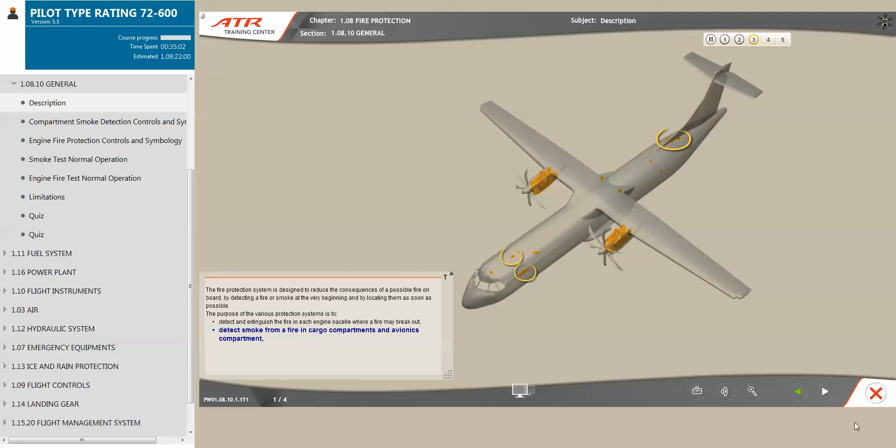The purpose of the various protection systems is to detect and extinguish the fire in each engine nacelle where a fire may break out, detect smoke from a fire in cargo compartments and avionics compartment, extinguish the fire in the areas which are occupied or may be visited in flight, detect and extinguish automatically the fire in lavatory dustbin.

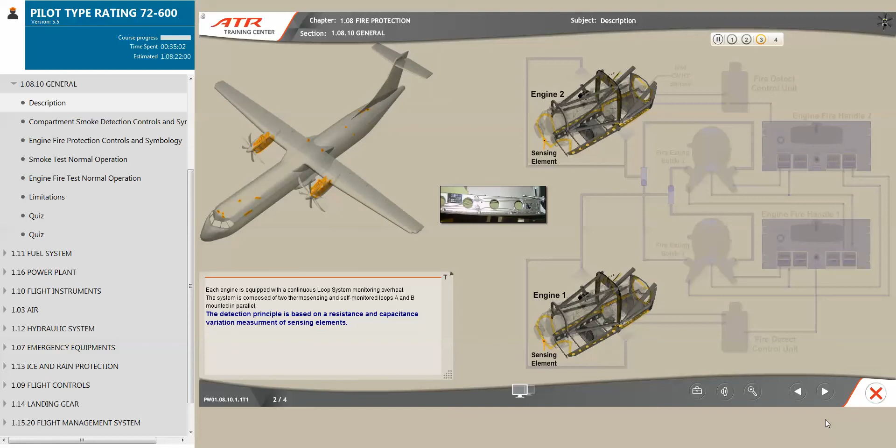Each engine is equipped with a continuous loop system monitoring overheat. The system is composed of two thermosensing and self-monitored loops, A and B, mounted in parallel. The detection principle is based on a resistance and capacitance variation measurement of sensing elements.

The Fire Detection Control Unit triggers the fire alarms only if both loops are sensing fire, or if only one loop is sensing overheat, providing the other one is deselected.

The engine nacelles are protected with fire extinguishers activated by controls in the cockpit. The system includes two extinguisher bottles which may be used either for engine 1 or 2. They are located on each side of the fuselage behind the wing center box.

Note: the extinguishing agent, CF3Br, trifluorobromomethane, is a fluorinated hydrocarbon pressurized by nitrogen. Dual squibs, which are installed in the discharge heads on each bottle, are ignited by pressing the corresponding illuminated agent push button on the engine fire panel.

Two two-way check valves enable the extinguishing agent to be directed toward the engine concerned. Extinguishing agent is then sprayed in the fire zone through nozzles.

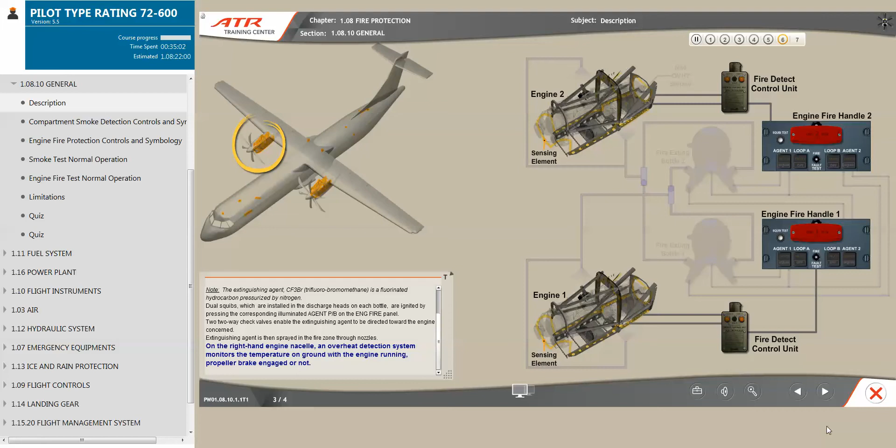On the right-hand engine nacelle, an overheat detection system monitors the temperature on ground with the engine running, propeller brake engaged or not. An overheat sensor is located below the exhaust pipes and links to a control unit. This system is inhibited in flight.

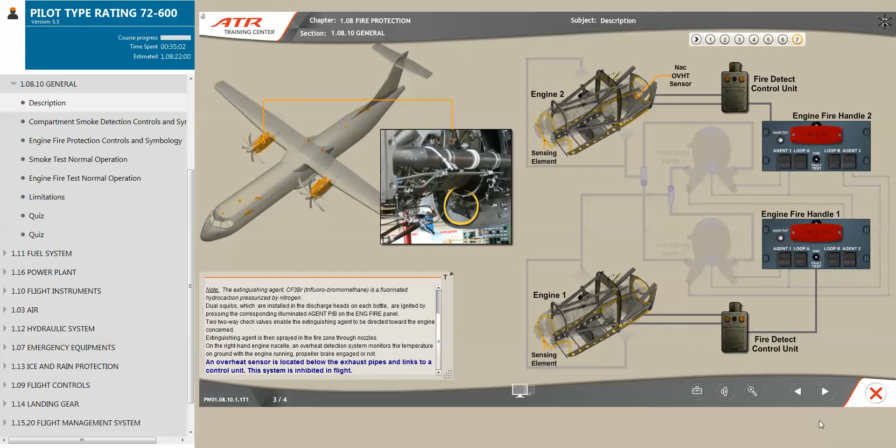The cargo compartments, the lavatory, and the avionic and electrical racks in the cockpit are protected by smoke detectors. These warning systems reduce the risk of fire through the early detection of smoke.

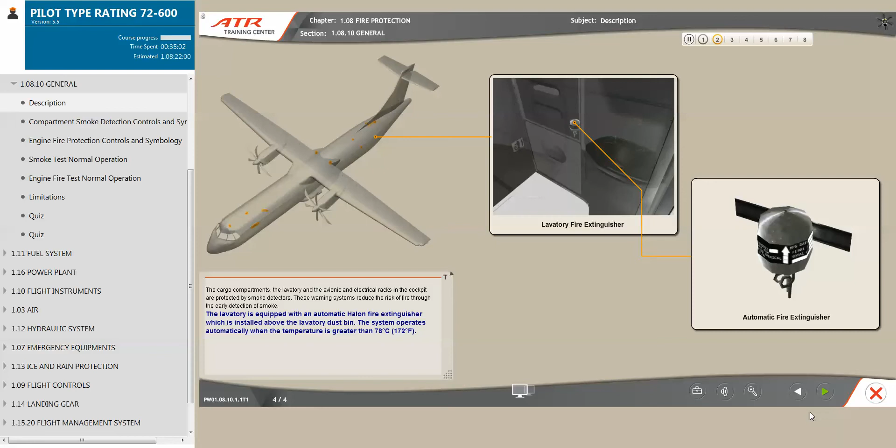The lavatory is equipped with an automatic halon fire extinguisher which is installed above the lavatory dustbin. The system operates automatically when the temperature is greater than 78 degrees Celsius, 172 degrees Fahrenheit.

The forward, aft cargo compartments and lavatory smoke detection is ensured by a photoelectric type smoke detector located in the ceiling. The principle consists of measuring the light diffraction of ambient air. Aft cargo and lavatory air is extracted and ducted through the smoke detectors by two fans which operate alternately.

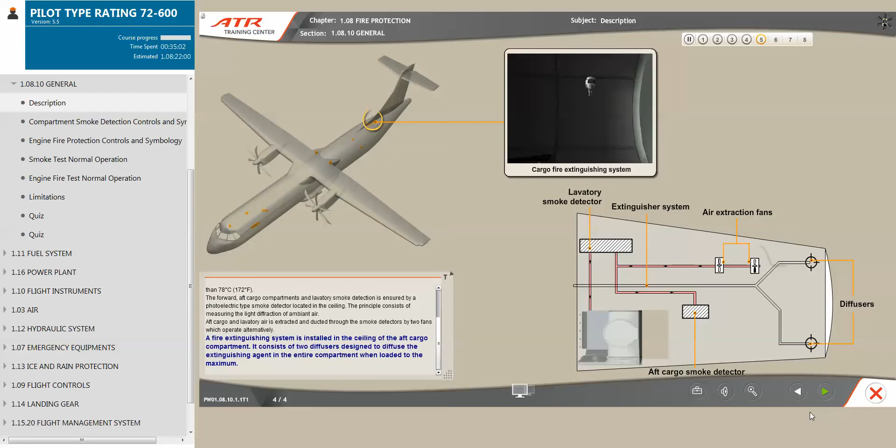A fire extinguishing system is installed in the ceiling of the aft cargo compartment. It consists of two diffusers designed to diffuse the extinguishing agent in the entire compartment when loaded to the maximum. A portable fire extinguisher is connected to the system orifice, located above the flight attendant rear seat, and discharged.

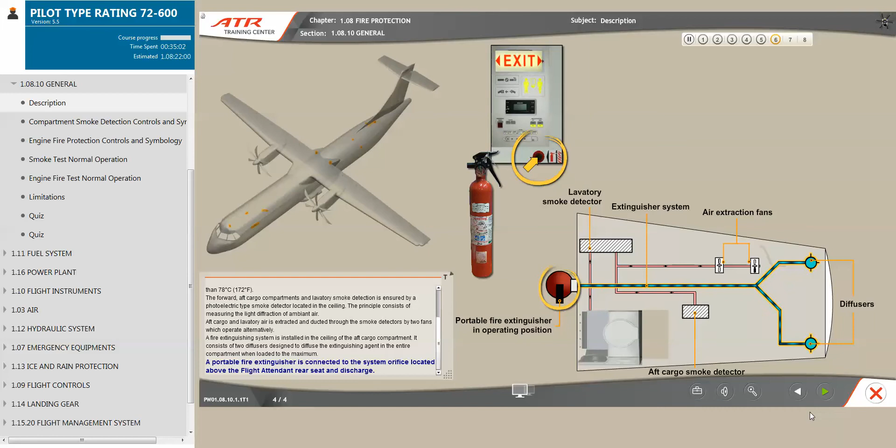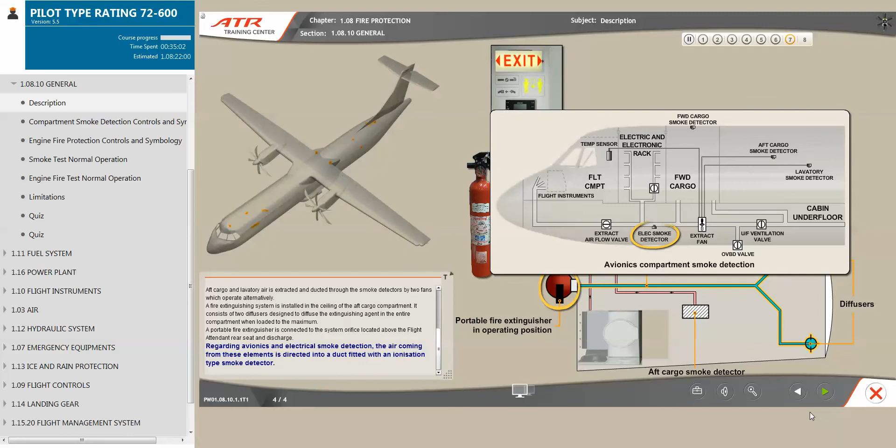Regarding avionics and electrical smoke detection, the air coming from these elements is directed into a duct fitted with an ionization-type smoke detector. The other areas require a crew member to extinguish any fire with the use of a portable fire extinguisher.

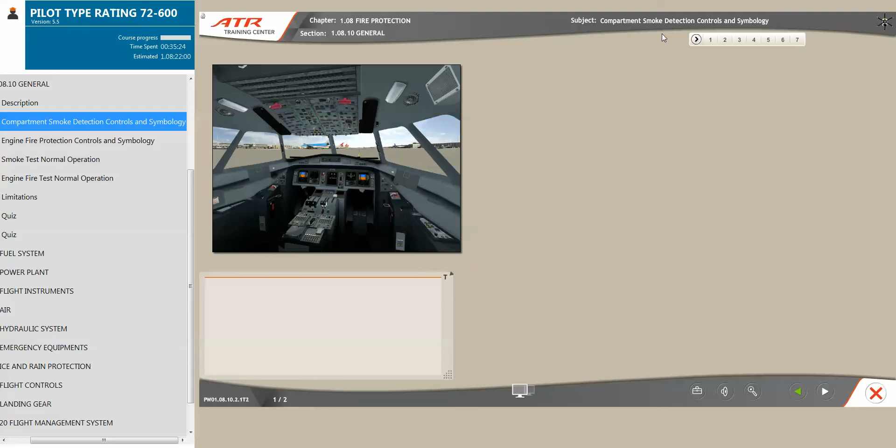The cargo compartments and lavatory smoke detection control panel is located on the overhead panel. A smoke test push button is used to check the smoke detector's integrity when depressed. Aft cargo compartment and lavatory smoke detection fans are controlled through the aft compartment/lavatory push button, and information is also displayed on the system display cabin page.

In normal operation, the push button is depressed without any light illuminated. Fans run alternately and are represented on the system display cabin page by a green circle in a rectangle.

In case of fan failure, a fault light illuminates on the push button, and on the system display cabin page, the fan symbol changes to a grey rectangle and amber circle with an amber DET FANS label displayed below. AIR FWD DET FAN amber message will be triggered by the flight warning system on the crew alerting window.

When the push button is released, the alternate fan runs and ALTERN light illuminates white. The symbol becomes cyan circle and rectangle with ALTERN DET FANS white label below. If first fan signal or alternate fan signal is invalid, fan symbol changes to a grey rectangle with amber circle and amber cross.

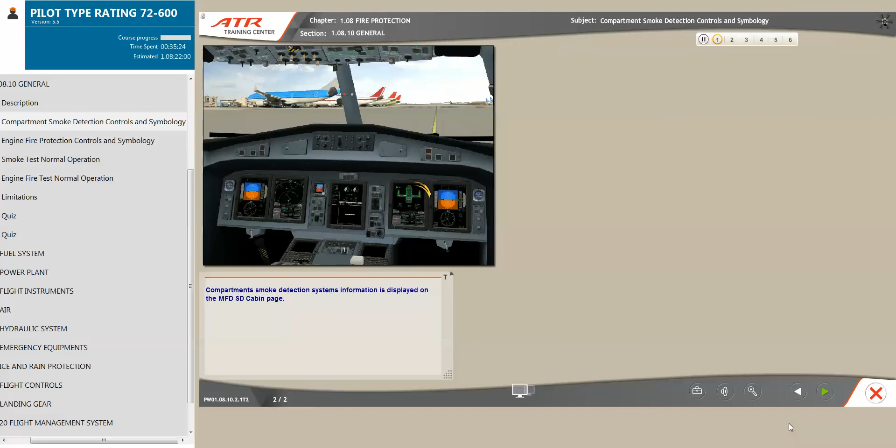Compartment smoke detection systems information is displayed on the MFD system display cabin page. Smoke alarms are displayed red reverse video around the aircraft shape at the location of the compartment for forward compartment smoke detection, electrical racks smoke detection, aft compartment smoke detection, and lavatory smoke detection. In case of smoke detector's invalid signal, associated alarm indication becomes amber crossed.

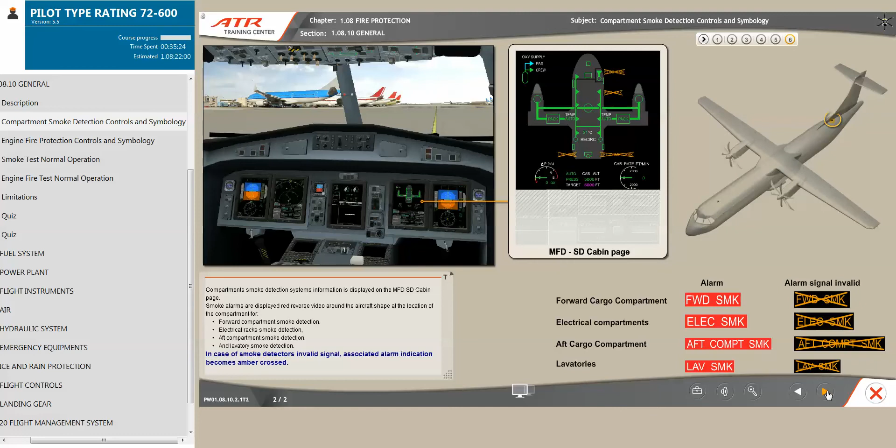Engine fire protection system indications are located on the engine fire control panel and on the EWD. In normal conditions, the engine 1 or 2 fire handle is pushed. In case of an engine fire detection, the fire handle illuminates red and the flight warning system is activated.

On the EWD, the red reverse video Fire 1, 2 flag is displayed outboard the torque indicator. In addition, the fuel shutoff red light illuminates on the corresponding condition lever, providing it is not in the fuel shutoff position. When the fire handle is pulled, on the associated engine side, squib lights illuminate white, meaning the corresponding

squibs are armed. The propeller is feathered, and on engine 2, the propeller brake electro valve is closed. The fuel low pressure valve is closed. The high pressure bleed air valve and bleed air shutoff valve are closed. The de-icing shutoff valve and pressure regulator and shutoff valve PRSOV are closed. The DC and the AC wild generators are disconnected.

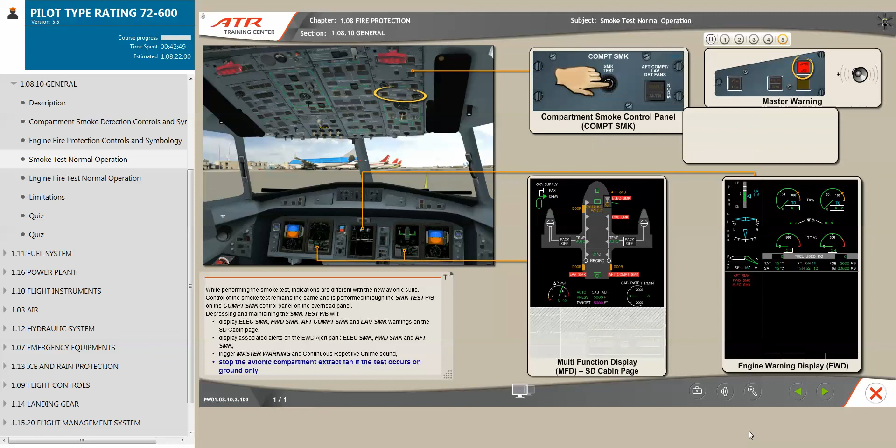warnings on the system display cabin page, display associated alerts on the EWD alert part, electrical smoke, forward smoke and aft smoke, trigger master warning and continuous repetitive chime sound, and stop the avionic compartment extract fan if the test occurs on ground only.

Controls for the engine fire tests remain the same and are performed through the engine fire control panel on the overhead panel. Squib test remains the same with the illumination of both squib lights on the Agent 1 and 2 push buttons when the squib test push button is depressed. Loop test is done by setting the test switch forward. Fault illuminates on loop A and B push buttons.

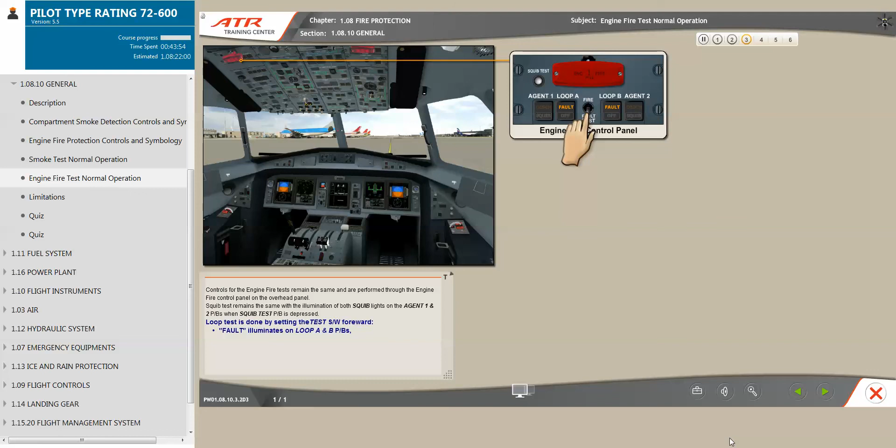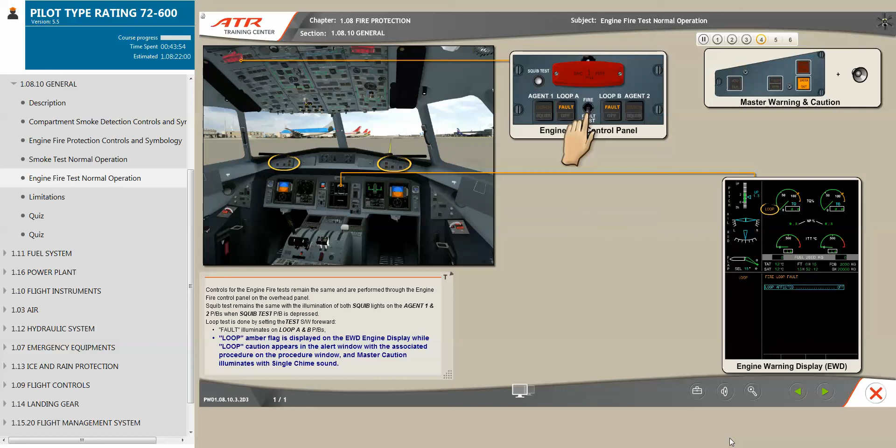Loop amber flag is displayed on the EWD engine display, while loop caution appears in the alert window with the associated procedure on the procedure window, and master caution illuminates with single chime sound. Fire test is done by setting the test switch backward. Fire handle illuminates. Master warning flashes with continuous repetitive chime.

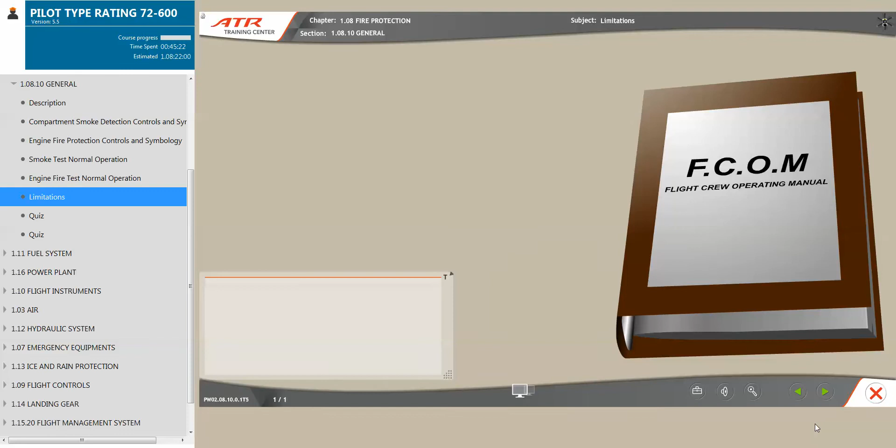Fire flag is displayed on the EWD on the affected engine, and the fuel shutoff warning light on the condition lever illuminates if the condition lever is in any position other than fuel shutoff. In case of fire protection failure, refer to the Master Minimum Equipment List MMEL of ATA 26.

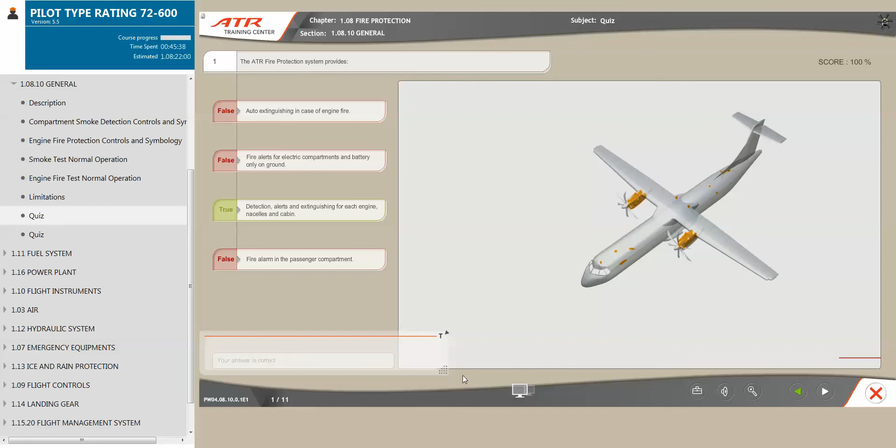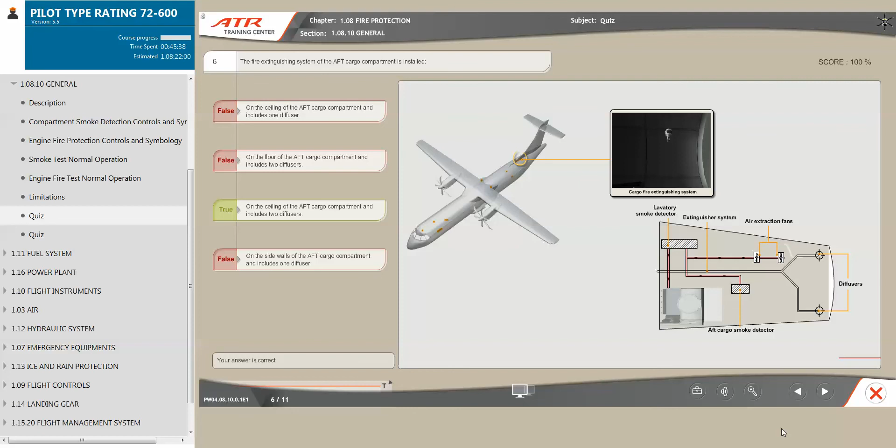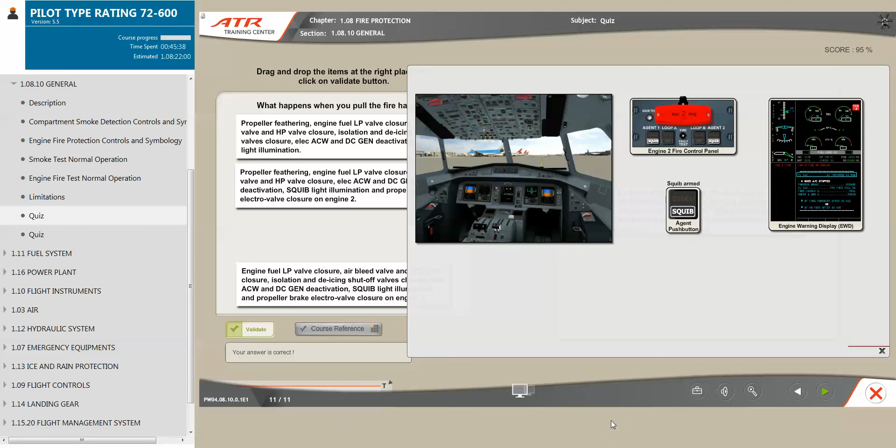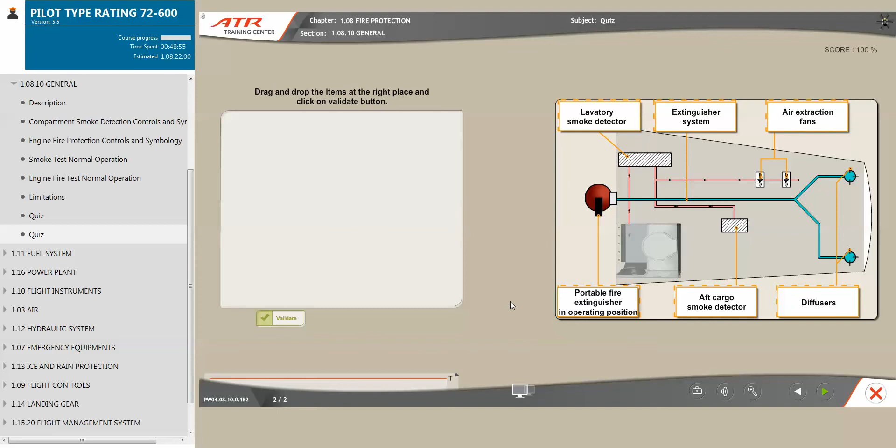Your answer is correct. (repeated quiz feedback) No, try again. Your answer is correct.